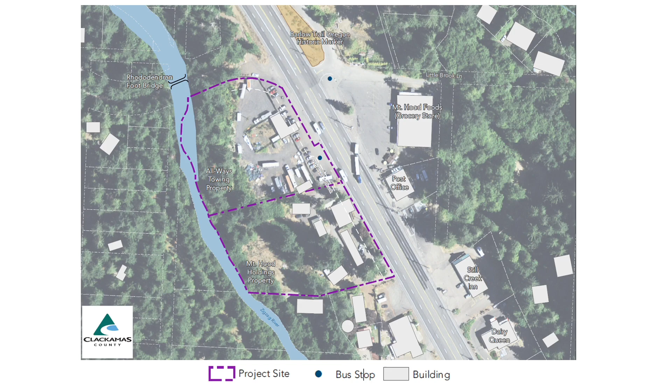During the spring and summer of 2020, Clackamas County, the Department of Land Conservation and Development, DLCD, and the MIG consultant team conducted interviews and held an online discussion to hear from community members and stakeholders with an interest and understanding of Rhododendron, the study area, and its potential future. An online survey was also provided to gain insight on preferred land uses and potential improvements.

The natural environment and surrounding forest create a unique setting and visitor experience that make Rhododendron a special place. There is a need for more housing, especially for workers, and desire to create a greater mixture of uses to strengthen the local economy. People value the small scale of existing development and want to retain this same look and feel, with public areas and green space integrated within new development.

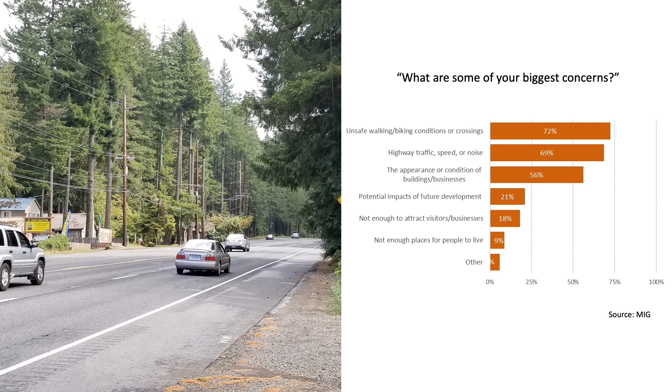There are no designated places for residents or visitors to walk or bike along the highway. There are no safe crossings, yet transit stops for the Mount Hood Express are on opposite sides of the street. In addition to community interests, the planning team reviewed existing zoning and planning documents and commissioned a feasibility study to understand development potential for the site. The study found some demand for rental housing, hotels, and certain types of commercial uses such as small-scale business space.

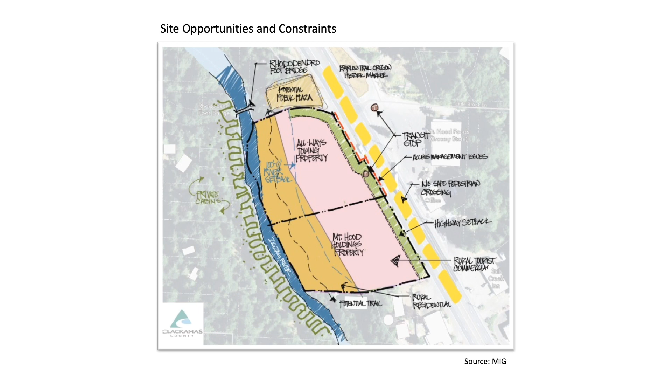Three potential land use alternatives for the site have been developed that reflect community interests, site conditions, and development feasibility. All three alternatives include an improved transit stop, a new public plaza north of the site that is currently publicly owned, as well as a potential soft surface trail along the Zigzag River.

Alternative A would provide a 2-story, 58-unit hotel, landscaping, and required parking on most of the site. This alternative would include 2 small-scale retail buildings at the north end with a small outdoor area, including reuse of the former gas station building. An improved crossing would also be provided at the north end of the site to connect the retail uses to Mount Hood Foods across the highway.

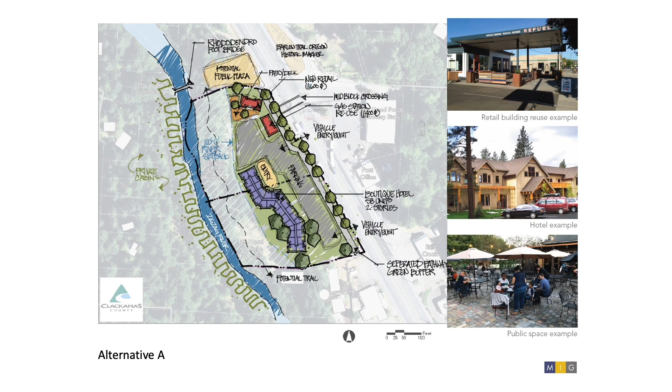Alternative B would provide 6 2-story cabin-style walk-up apartments totaling 51 units, as well as landscaping and required parking. Like Alternative A, this alternative would also include 2 small-scale retail buildings at the north end with a small outdoor area, including reuse of the existing former gas station building. An improved crossing would also be provided at the north end of the site, similar to Alternative A.

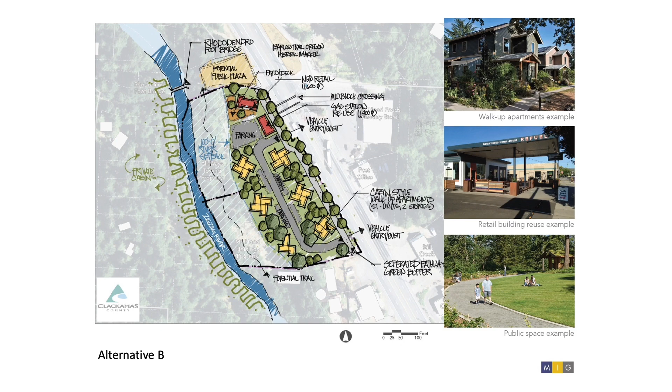Alternative C would provide the same type and number of cabin-style walk-up apartments as Alternative B, but features small-scale retail buildings towards the center of the site. Unlike the first 2 alternatives, this alternative features 2 new 1,500 square foot retail buildings with a central gathering space that aligns with an improved highway crossing connecting the site to the post office building.

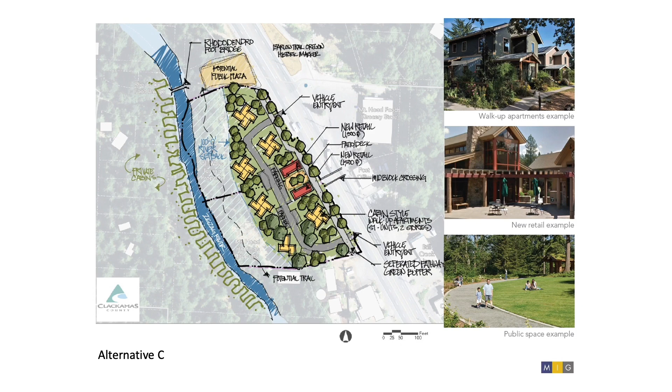Along with potential land use alternatives, there are 2 potential street frontage improvements based on existing state and local planning recommendations and guidelines. Both concepts assume use of a center pedestrian refuge for the highway crossing and potential pedestrian crossing signals. Any final design would require approval by ODOT.

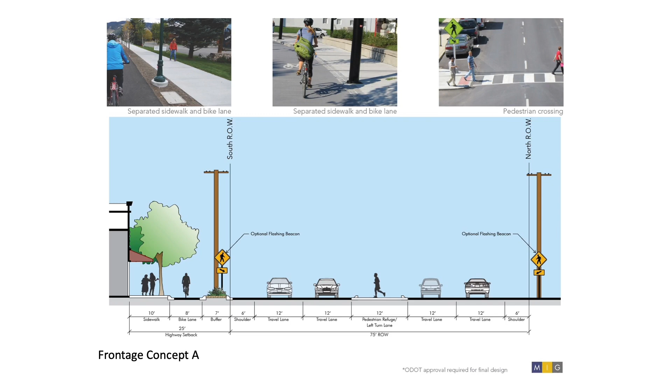Concept A would provide a continuous 10-foot sidewalk and separated 8-foot bike lane along the site's highway frontage. A 7-foot landscaped area would provide a buffer from the highway. Concept B would provide a shared 15-foot wide bike and pedestrian path along the site's highway frontage. A wider 10-foot landscaped area and water quality swale would provide a buffer from the highway.

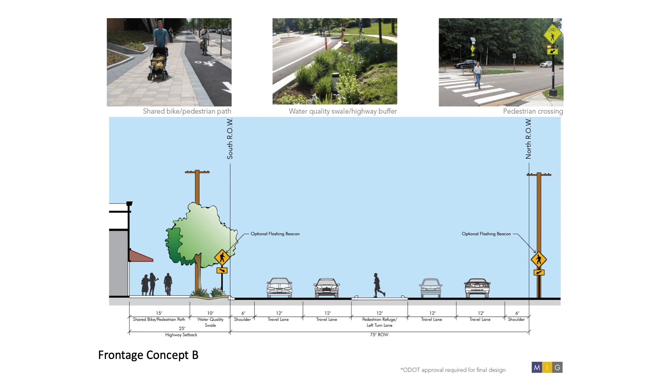As draft alternatives and concepts, we would like you to tell us what you think. What would you like to see take place on the site? What right-of-way frontage improvements to improve mobility would you like to see? Find the survey on the project webpage and respond to a few questions to provide your opinions. We will share responses later this fall and use your opinions to create the preferred alternative for land uses and frontage improvements for this site.